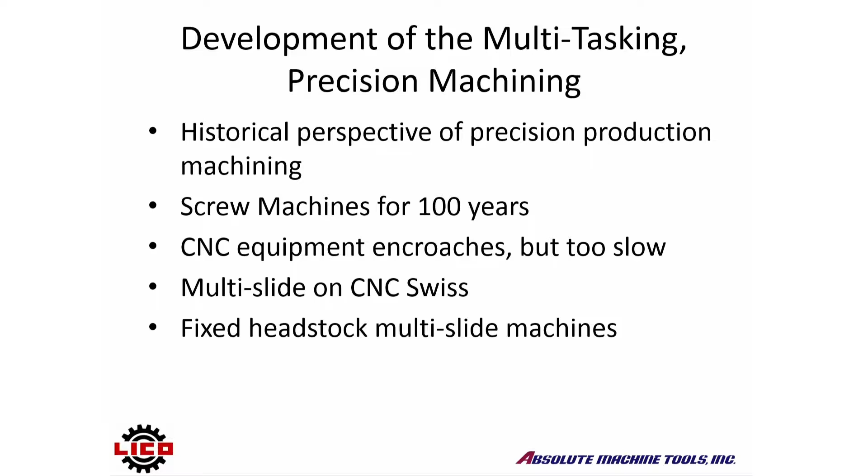Screw machines have been evolving since the late 1800s, a little longer than I've been around, but not a whole lot. Brown & Sharpe's original patent was really for combining the material chucking and feeding in one cam revolution. And 100 years later, that was still a feature of those machines.

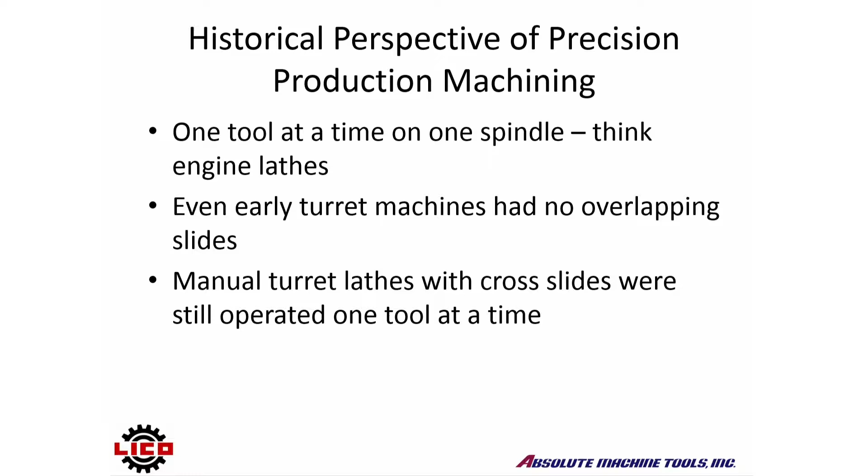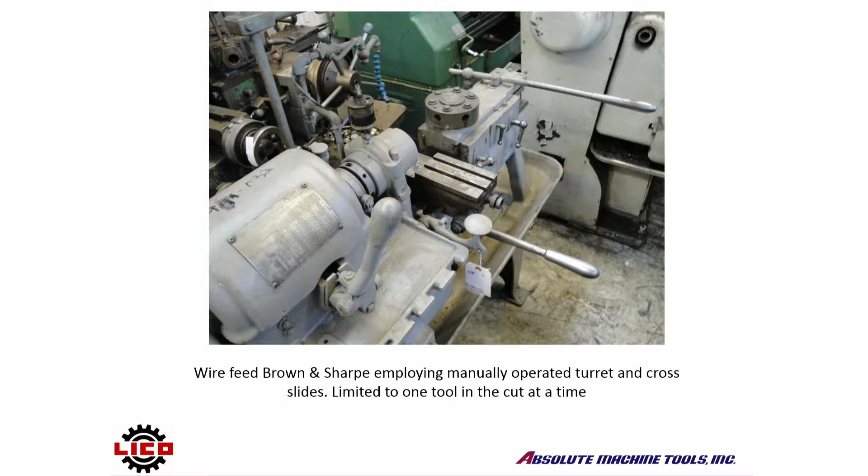Because the machines were operated manually, you could only perform one operation at a time, so serial was the norm. On this older B&S wire feed machine, you could have multiple tools on the machine, but because an operator was operating it by hand, you could only bring one tool in at a time.

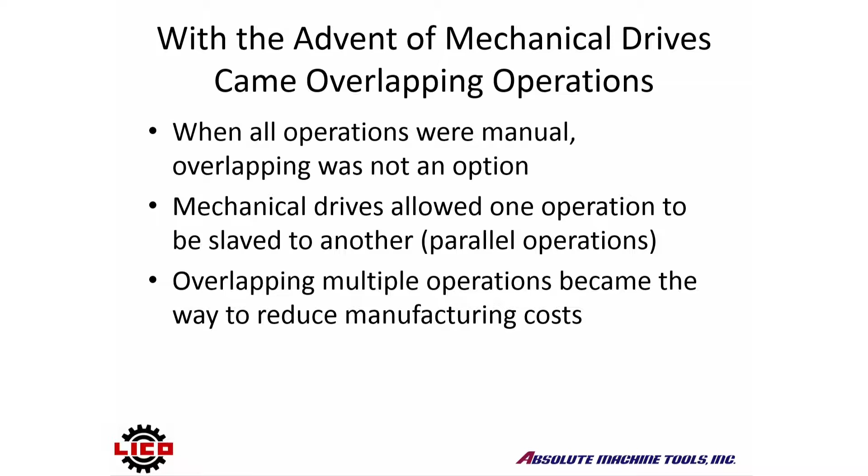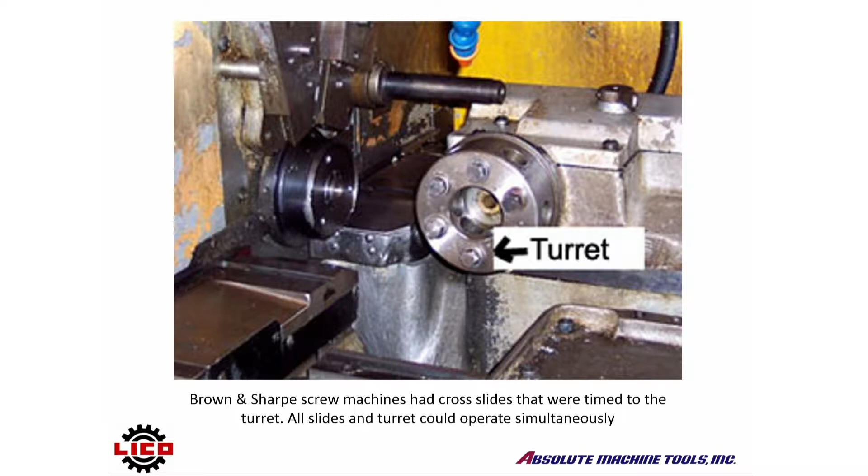Mechanical drives, which could operate the slides simultaneously, allowed for the overlapping of operations. Single spindle machines tied all the cutting slides into the back shaft of the machine for synchronization. Multi-spindle machines combine the cross slide and the turret at each spindle in order to achieve that overlapping. Both of these operated through mechanical designs actuated by cams that were configured to specific parameters.

On the LICO machines, all slides are 2 or 3 axis and can operate simultaneously. All slides are actuated by ball screws and drives in all axes. There's no air or hydraulic actuation of the slides on these machines. More than one customer has described this particular model over here, the LNTS, as a Brown & Sharpe on steroids.

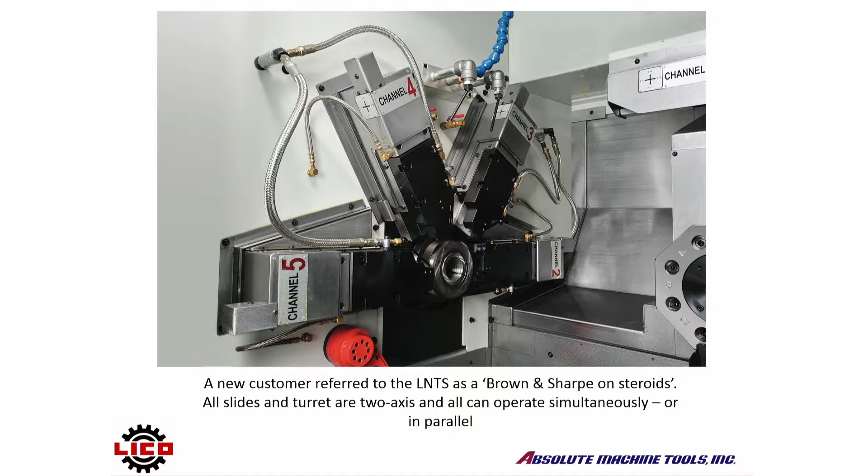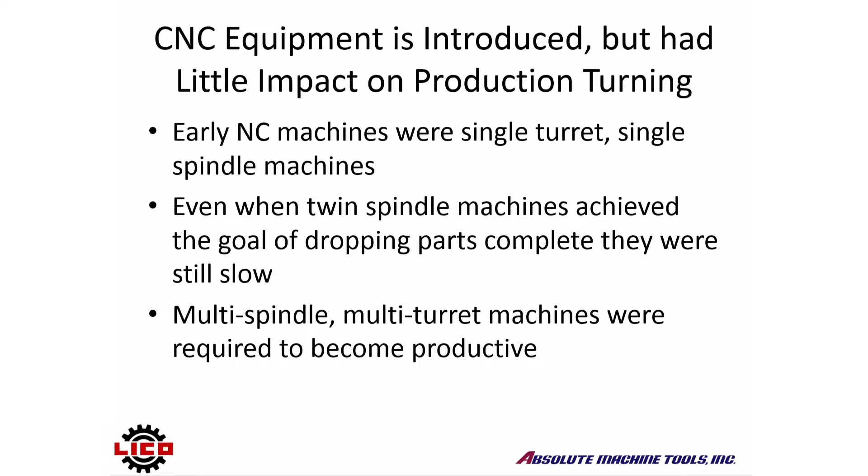For years, CNC salesmen came into my shop and told me that I'd better get on board with the times, that I was going to get left behind. But every application I looked at with them, my screw machines were beating their cycle time terribly. Even with the advent of the twin spindle machines, they were still much, much slower, although they could now drop the parts off complete, eliminating some secondaries.

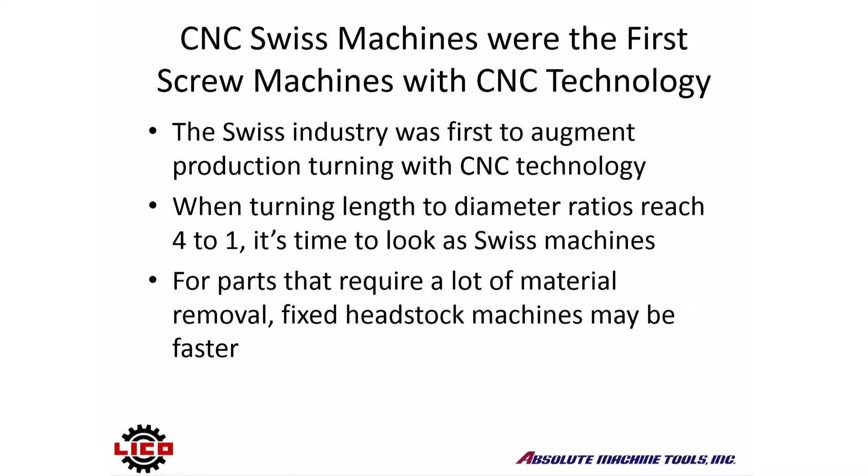Smaller Swiss machines were really the first to employ CNC technology on multi-slide equipment. They're the perfect machines when the length to diameter turning ratios exceed 4 to 1. But heavy metal removal is better done on fixed headstock machines. They're just a bit more rigid.

We have a NEXTurn Swiss over here, and down in booth 665 at the Absolute booth, there's a couple of different Swiss machines. If heavy-duty compact Swiss turning is your need, then take a look at those.

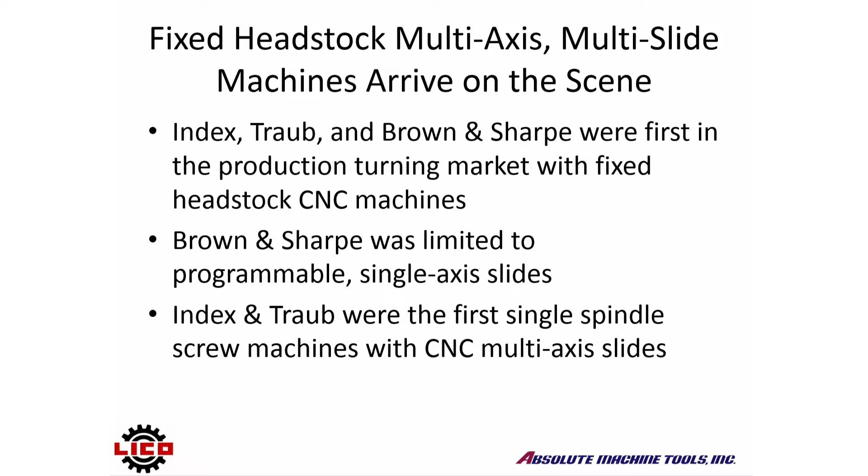Index and Traub were really the first in the fixed headstock, larger diameter, overlapping slide machines with CNC actuation, and they came with a pretty good price tag. Great machines. These companies were truly the pioneers in the fixed headstock CNC multi-slide turning, and they've evolved into some quite sophisticated machine tools, still with a hefty price tag.

LICO has presented the market with the fixed headstock, multi-slide, multi-axis CNC screw machines that are affordable. From medium to complex parts, LICO has a multi-slide machine that will make the parts that you make.

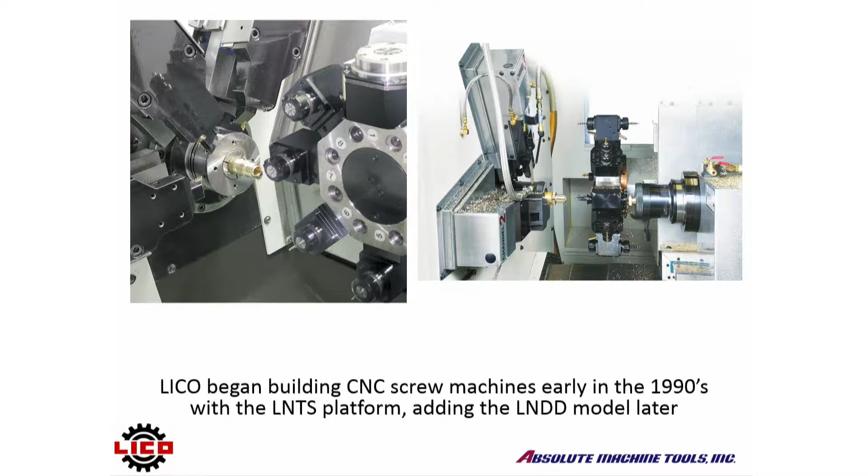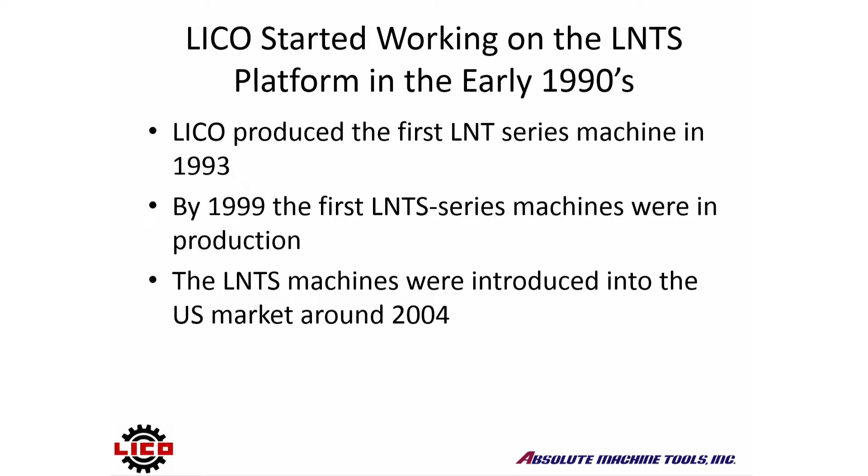A little history about LICO. They began actually making cam machines, so they do understand the screw machine market and the screw machine concept. Being familiar with the screw machine market, LICO began developing their first CNC machines in the early 1990s. Late in the 1990s saw the first LNTS platform. LICO continued their success with the LNDD twin spindle machine, which is over here.

The LICO machines come equipped with tool holders in all positions, dual high pressure coolant pumps, or oil pumps I should say, air conditioned control cabinets, parts catchers, parts conveyors, chip conveyors, and that's all built into the price.

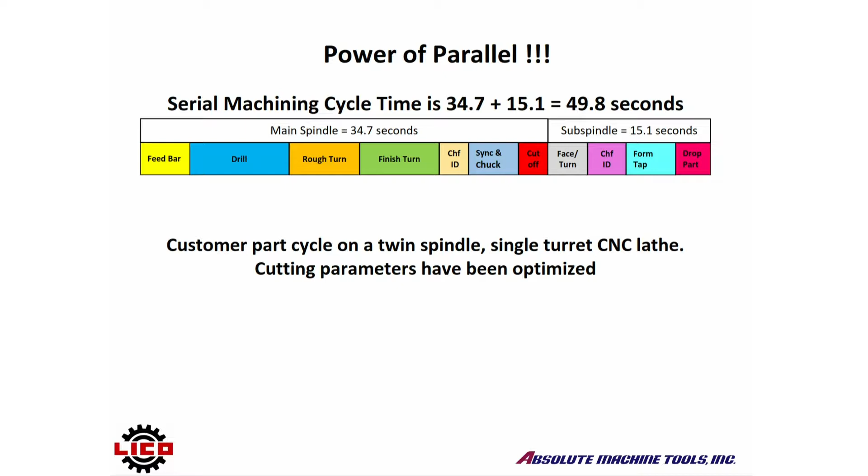It got the part dropped complete, but they weren't terribly thrilled with their cycle time. So we looked at this on a twin spindle, twin turret machine. And as you can see, there was quite a bit of productivity improvement there. The cycle time is reduced by the amount equal to the sub spindle, which was a 30% cycle time decrease. That results in a 44% productivity increase.

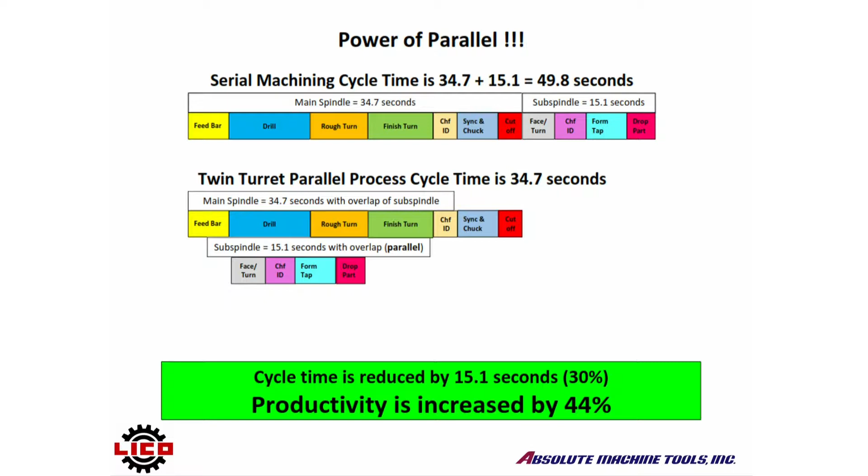And I've seen some things on CNC lathes that are actually running 3 times as fast. This was an actual time study that we did for a customer, so it's not a trumped up part. It's just one that we picked out to use.

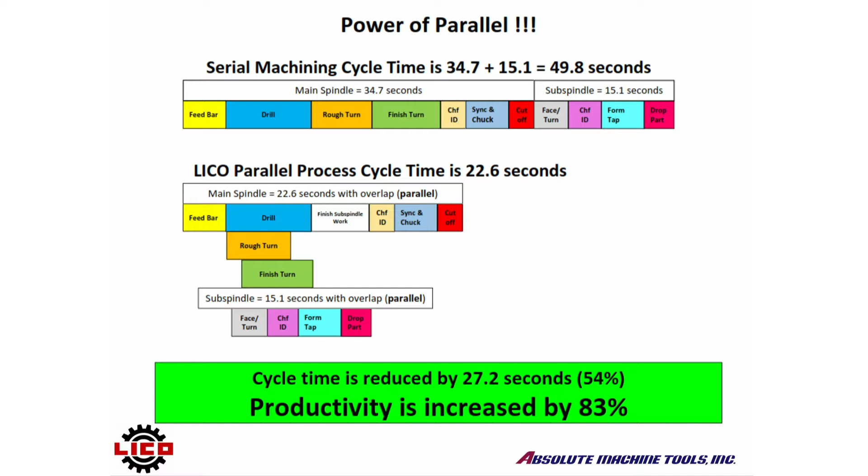We overlapped the 4 tools here simultaneously to get this cycle time. LICO equipment with this cross-slide concept is able to overlap up to 5 tools in the cut at once. Now, I'm not going to tell you every part cycle you're going to get 5 tools in there, because there's just not room for them all at once. But it's real common to be getting 3 and 4 tools at a time in here, which makes for a huge productivity gain.

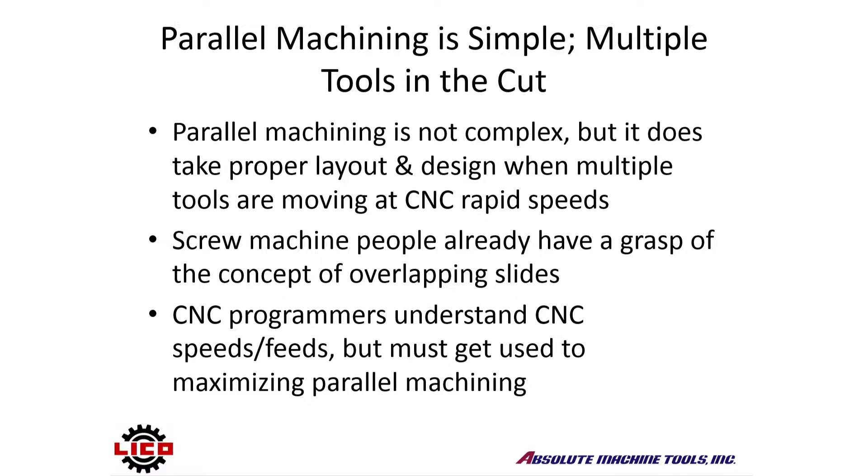Screw machine people already understand this concept of overlapping slides. CNC programmers who are used to single turret or even twin turret machines may have a little learning curve because the optimization mode is different. On a single turret lathe, you optimize each tool in the cut to get your best cycle time. Once you're overlapping slides, you may have a lower common denominator, so some tools may not run as fast as they could ultimately, but your cycle time, as you can see from the chart before, is much, much faster.

How we process precision parts has changed. It used to be, at least on my shop, you machine the first side, it sits there in the pan for a while, and then eventually someone gets around—or maybe you put it on the same machine to the second side, and somebody stands there and puts it in the machine and pushes the button. That's as close to parallel as it gets, as you might put it on that same machine at the same, or a different machine at the same time.

Then we kind of evolved into the cell concept. It might have been manual—you might be running parts off a multi-spindle and taking them and putting them in a drill press or putting them in a lathe or another piece. Or even over here we have a machine called a Q5 that does automated loading and unloading and gang tool kinds of things. Today there are other ways around that cell concept besides having somebody stand there and do it.

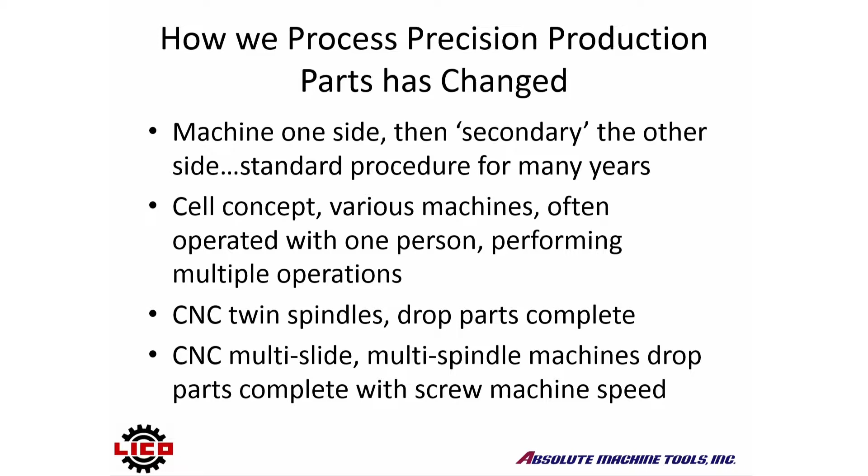Again, we evolved into the twin spindle lathes. They dropped off parts complete, but the CNC multi-slides not only can drop complex parts complete, they can do them at cycle times that approach at least screw machine speeds. There used to be a choice: you could have CNC quality or you could have screw machine speed. Today, you can combine the best of both of those worlds.

And that's really what we're talking about with bringing CNC technology back, in a sense, to the concept of parallel and overlapping slides.

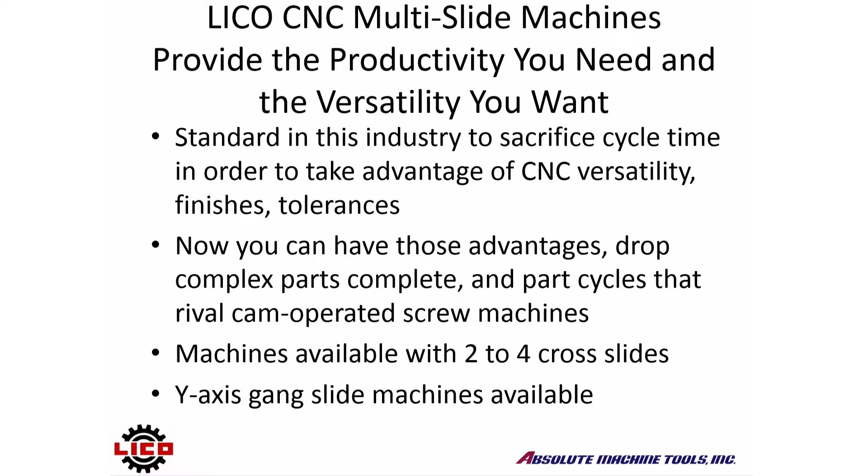The LICO platform is configurable for the number of cross slides. This one can have 3 or 4. This one can have 2 or 3. Or you can get the machines with a 7 live tool, 5 fixed tool, XYZ gang slide on the other side. So for this machine, you can have a double Y machine, for instance.

These machines are quick to set up if you pay attention to standardization. And I don't care where you are or what you're doing in the industry, if you're not standardizing your tooling and what you're doing, you're leaving time on the table.

I have customers, one who was here this morning, that he's running 2 and 3 different parts per shift at times on his LICO machines.

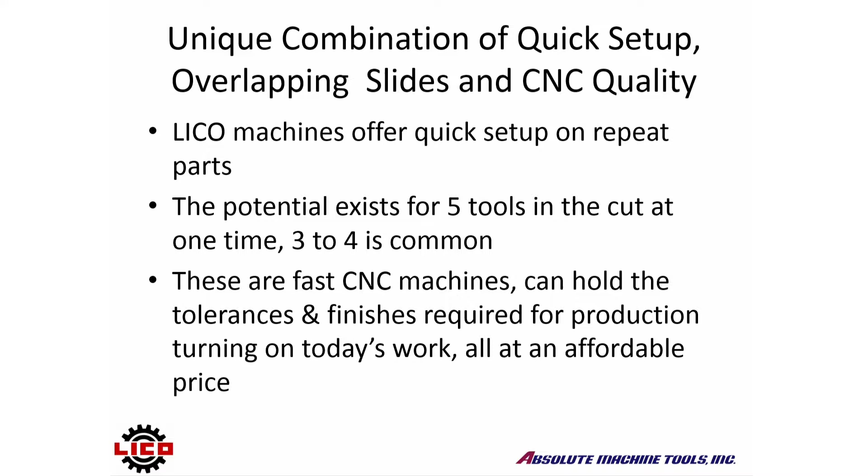Multi-spindle shops experiencing lower volumes, CNC shops requiring larger order quantities, shops looking to replace machines that fewer and fewer people are able to set up and maintain—those are all good opportunities for looking at machines like these. LICO has been able to be an answer for those kinds of issues for several years now.

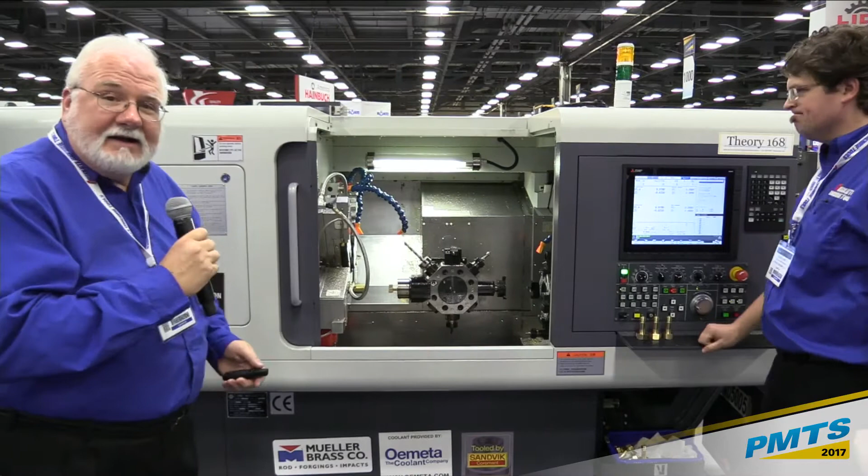Okay, now we're going to go over here to the machine. And everyone, this is Phil Jutt, and he's our applications engineer. The first thing, let's see, I need to figure out how to stay out of the way here, so let's do this. And Phil, if you'd pull that slide out a little bit.

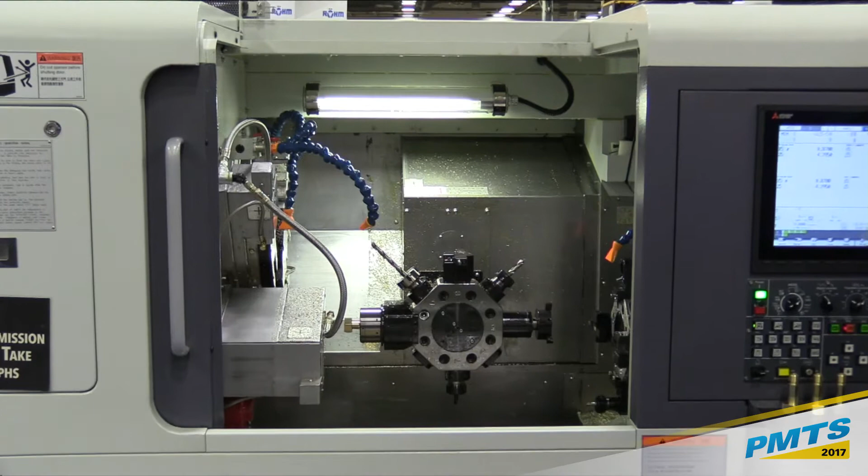Can we see that one? Can we do one of the upper ones? Sorry.

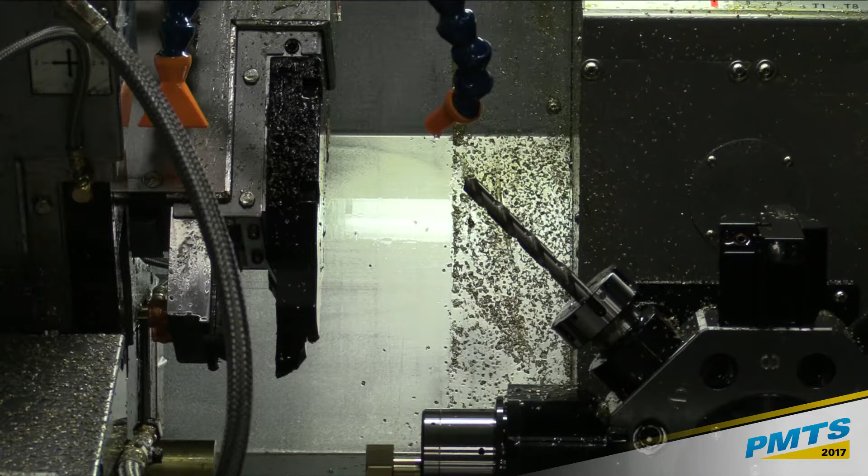What I want to show you here on the machine is right here. This dovetail and gib slide - these are the same kinds of slides that you have on your Brown and Sharpe machines. And the reason that's important, these machines have the rigidity on their cross slides that you can still run form tools. Now, you may not always want to.

If your quantity's small, there's no point. But there are times that form tools can save you a lot of time. These machines are still capable of doing that. You try to put a form tool on a typical Curvic coupling turret lathe, and by the time you get very wide, you're going to get chatter. These are a little more substantial.

Okay, Phil, if you would run a part cycle. This part cycle is actually programmed at steel speeds and feeds. We've got brass in here, so we don't have to be changing tooling all the time for the machine. So we'll see how well this works through the glass.

So this is the back cross slide and the turret overlapping at once. And there are various times when we can have 2 and 3 of these tools in the cut at once. In just a minute here, this will come over, and there's that slide working, and the back slide, and the drill here. The part that you saw that was in it's now working on the back spindle.

Sorry, it's just very difficult for the camera to follow all that. This is now working on the back spindle while we've got cutting going on up here. Oh, there we go, you can kind of see it there. That thing you see spinning is a polygon tool.

Again, later we'll show you the parts here, and you can kind of get an idea of what they're doing. Let me grab a couple of these, and you can just pass them around a little bit and get an idea of what it's making there.

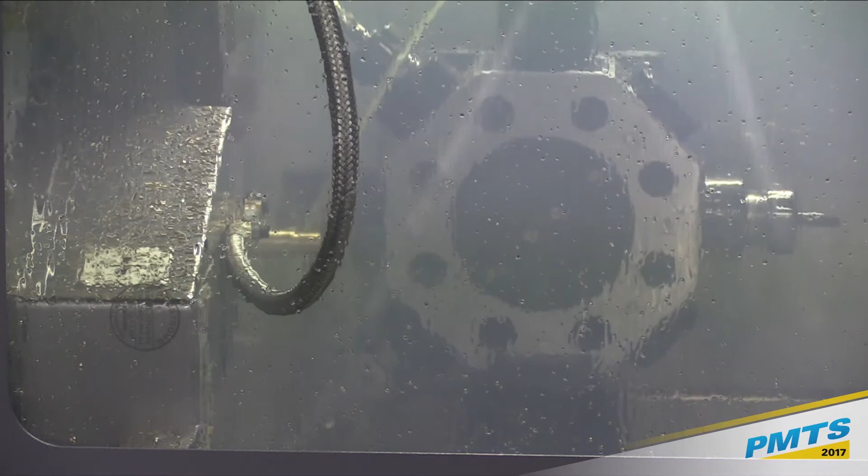This particular model has a turret-mounted subspindle, whereas this is a twin spindle model. So the back working is done in a different way. This is now putting that hex on.

It doesn't show up on there. That's all right, that's the subspindle there. We're using it to pull out instead of using a bar loader. It's just holding on. This subspindle can synchronize at any spindle speed the machine can run, so you don't have to drop it down to 0, or sometimes on some machines you have to drop it down to 50 or 100 RPMs. No need to do that for this machine.

Okay, we'll run a part on this one over here. So this machine is a little different. It's a little different in that instead of a turret-mounted subspindle, this one has a full independent subspindle with a double C axis. I'll try to stay out of the way here.

Go ahead, Phil. This one still has 3 cross slides, which is equivalent to 4 cross slides on this machine, just so you know, because this machine has to use one of those cross slides for a cutoff. We can cut off with the turret on this machine because it has the independent subspindle.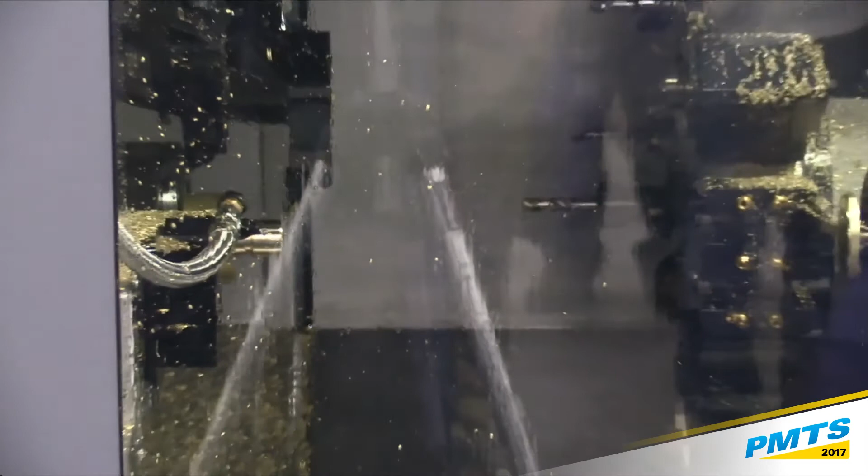On these machines, the turret, again, the same as that one, can have live tools in every position. This turret on this machine is also a Y-axis turret, and we can do off-axis work. You can also put angled tool holders on there, and you can do angled work on that. Although again, I would do that for longer runs, not if you're going to run 50 parts.

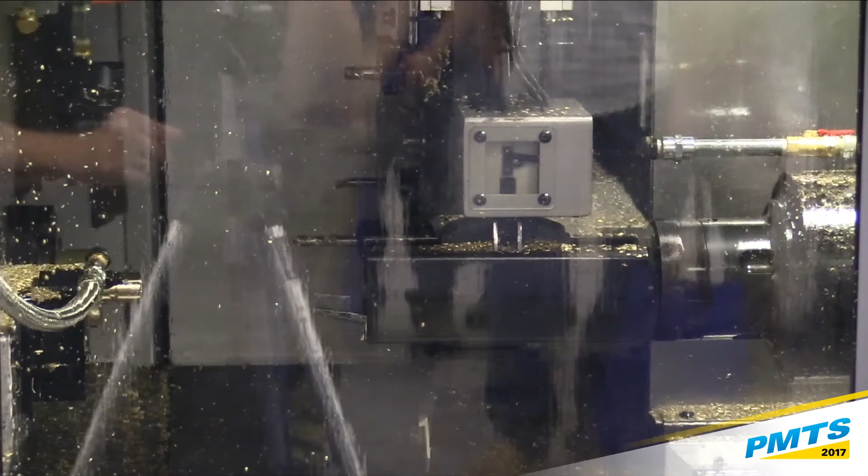What you just saw there was the overhead parts catcher. You can get this with the lower parts catcher that just comes out like this, or the overhead gantry parts catcher. The overhead's real nice if you're doing heavy parts or parts that are more delicate. It'll take them back to a much shorter chute back here and a little conveyor. It protects the part. It's also really good if you're doing long parts.